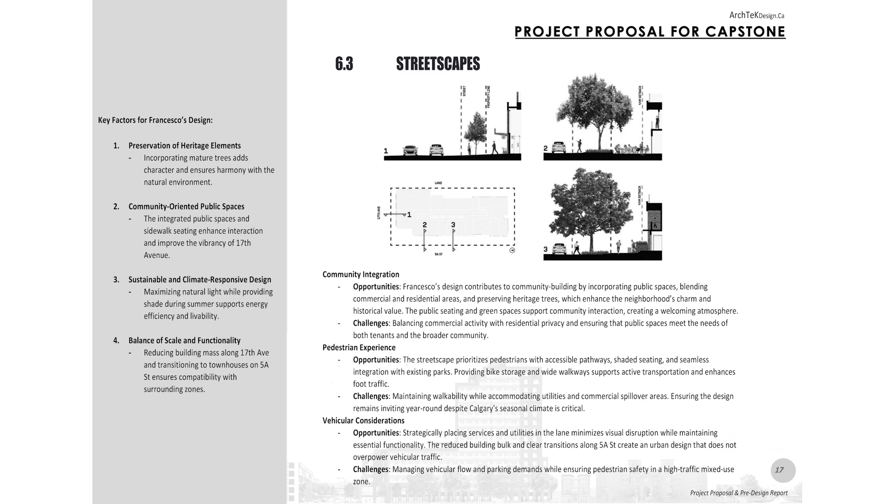We started our Capstone journey by presenting our project proposal, which centers on the redevelopment and enhancement of Francesco's mixed-use building. The project aimed to transform the existing structure into a vibrant, sustainable space that integrates commercial activity on the ground floor with a variety of residential units above, promoting community engagement, accessibility, and alignment with current codes and urban planning goals.

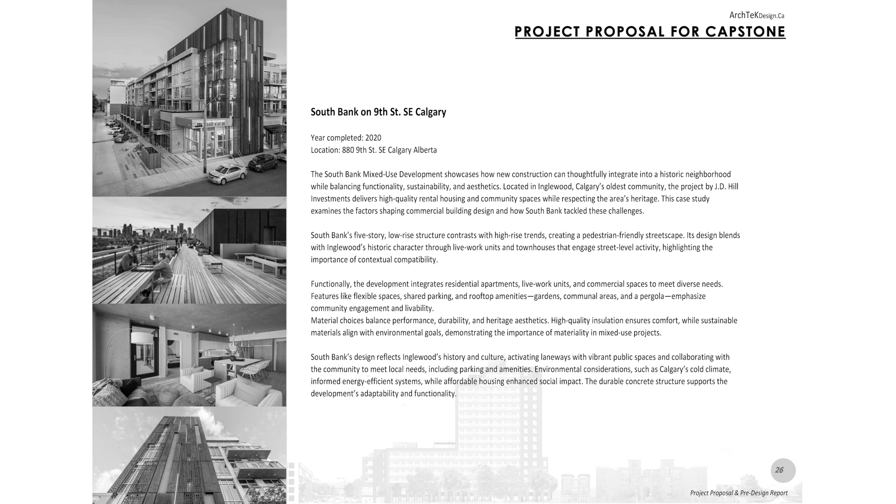Our concept layout focuses on thoughtful urban integration using step-back massing, mixed-use programming, and clear zoning to create a sustainable, community-oriented design with vibrant public spaces and strong connections to the surrounding context.

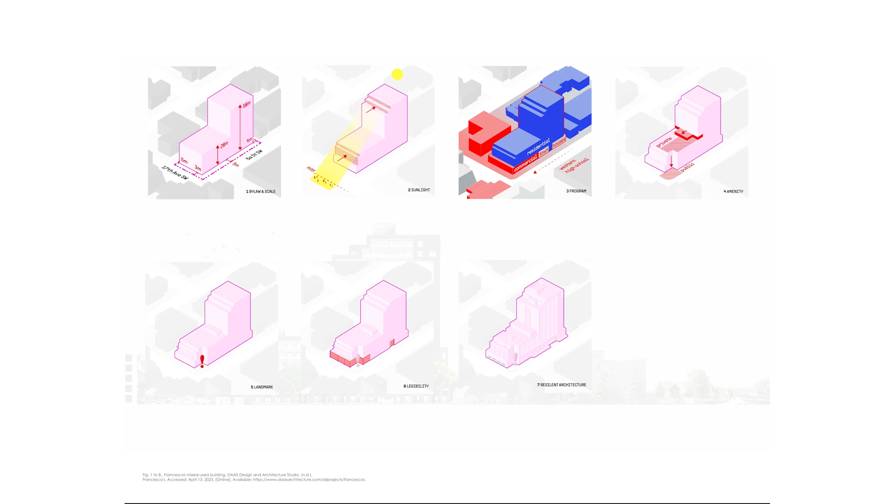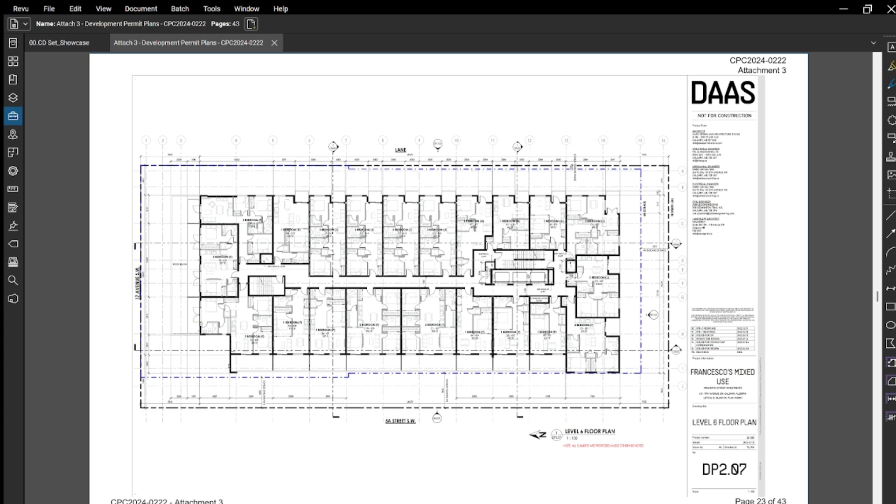To take a more real-world approach, we worked from an existing set of development drawings provided by an architectural office, taking these earlier documents and carrying them out to contract documents instead of designing ourselves. Our goal was upholding the design intent set forth by the original architect, and this approach to the Capstone project meant we could have a more technical focus, prioritizing systems and code implementation, and really understanding the software we are using.

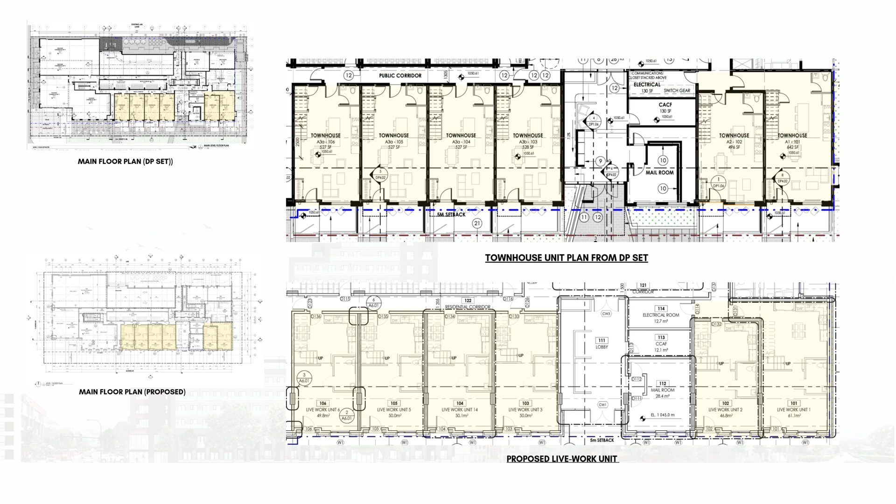One of the most successful outcomes of our project was converting townhouses into live-work units. This allowed us to navigate the zoning restrictions of the 5A Street neighborhood while respecting its character and scale. The live-work concept provided flexible spaces that support both residential and commercial use, offering greater revenue potential for the client.

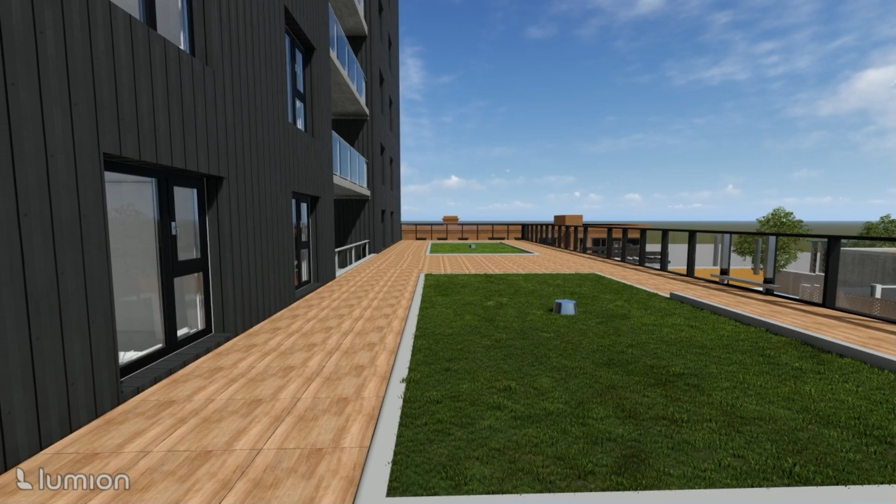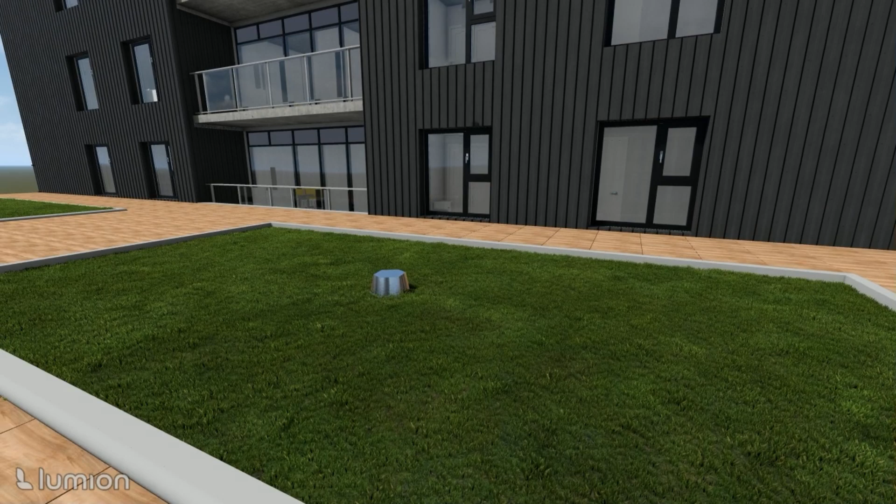Another key highlight was the integration of a green roof. This transformed an underutilized rooftop into a sustainable functional space that improves energy efficiency, manages stormwater, and reduces the urban heat island effect. It also offers residents a natural area for relaxation and social connection, enhancing livability in a dense urban setting.

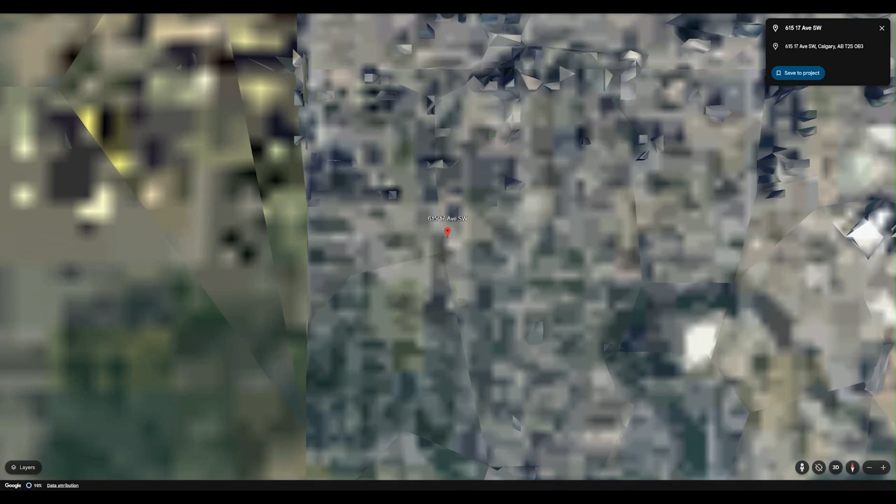Our project is located at 615 17th Avenue Southwest, Calgary, in the evolving community of Cliff Bungalow, just south of the Beltline. Positioned along the active 17th Avenue corridor, the site benefits from both established urban fabric and ongoing development, making it ideal for revitalization.

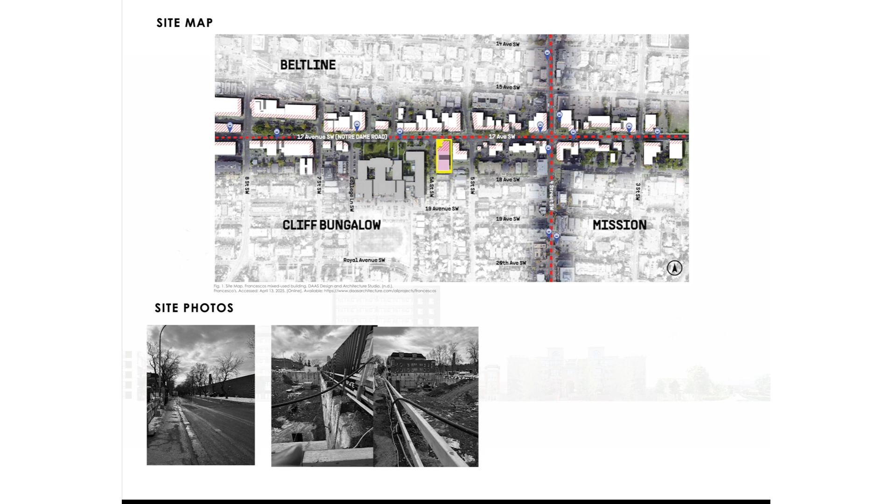The project covers a parcel area of 28,735 square feet with a proposed direct control zoning. The building features a variety of occupancies with a total GFA of 171,965 square feet and a maximum height of 50 meters. The design aims to contribute meaningfully to the urban streetscape and support the continuing growth of this key inner city corridor.

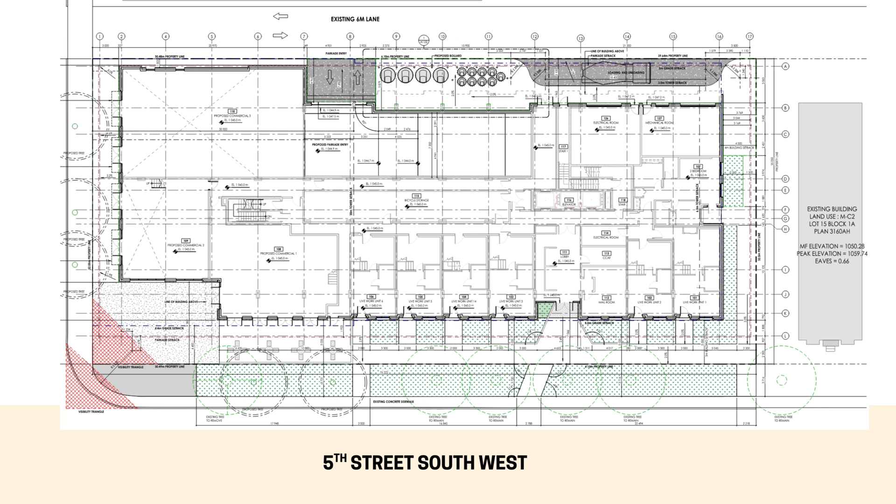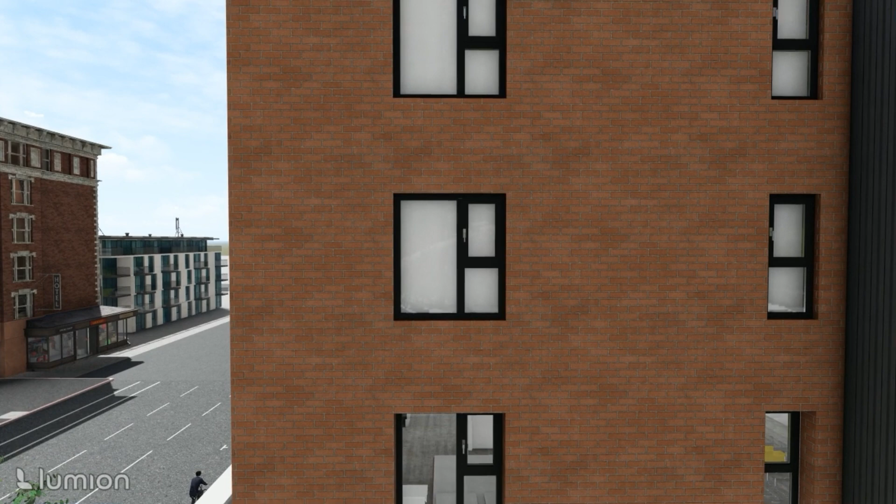With entrances on both 17th Avenue and 5th Street, the lobby, service access, and retail frontage were carefully positioned to avoid conflicts and maintain a welcoming street presence. Designing the Francesco mixed-use building was a complex yet rewarding challenge. We paid close attention to the building envelope, selecting materials and systems that balance durability, aesthetics, and energy performance.

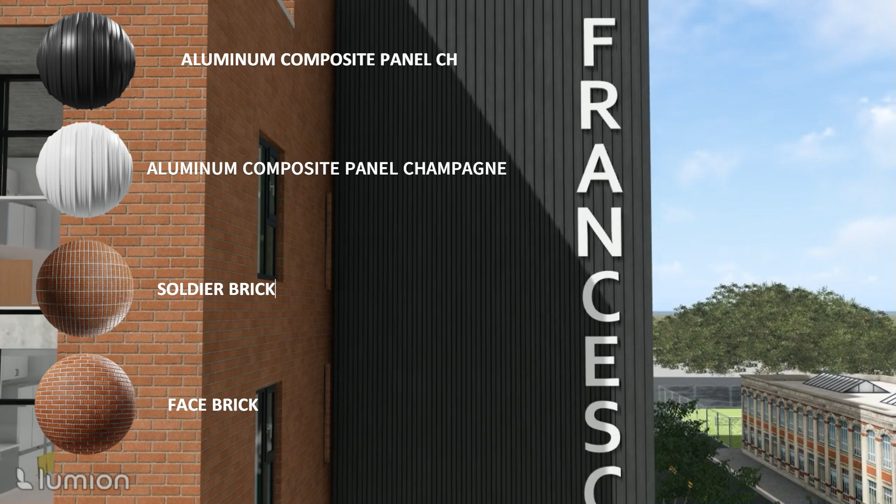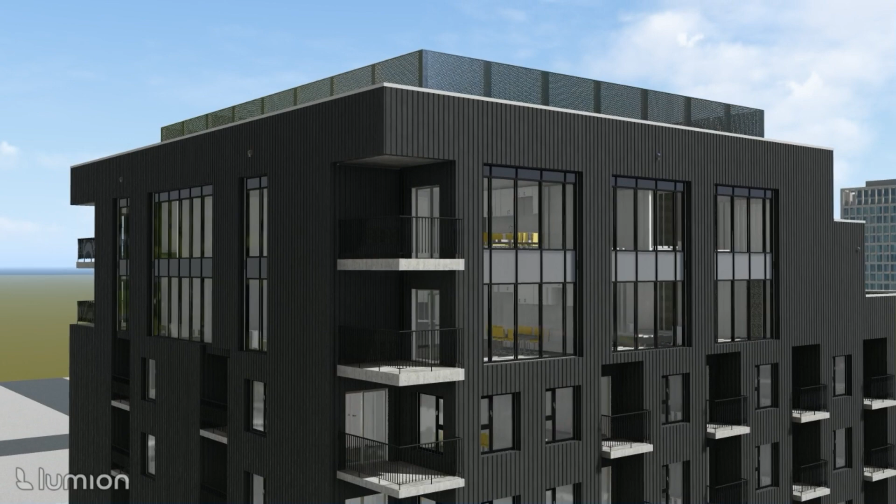The exterior of Francesco's features key materials such as aluminum composite panel paired with brick cladding in red to complement the surrounding architectural character. Curtain wall and window wall assemblies enhance energy efficiency and daylight access. These materials were selected not only for their durability and visual contrast, but also to highlight different building elements while maintaining a cohesive overall appearance. The aluminum panels introduce a sleek, contemporary feel, while the red brick adds warmth and connection to the historical context of the 17th Avenue corridor.

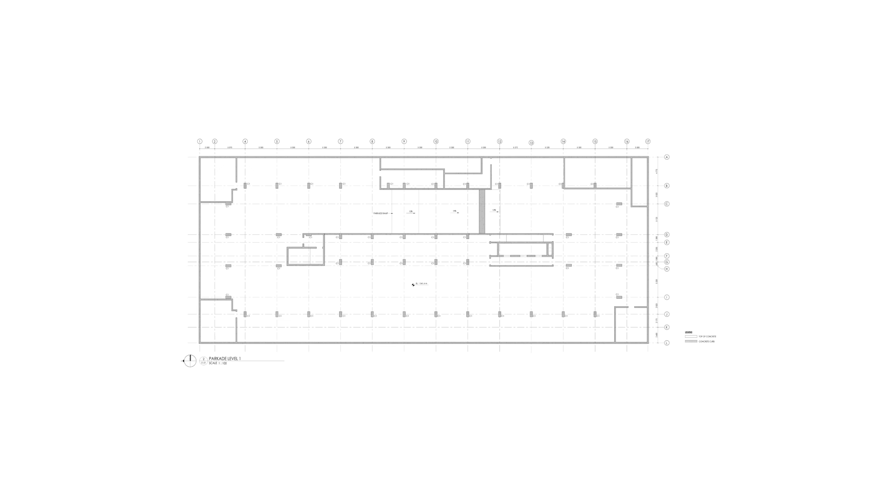Our challenge in the DP set was understanding how the building would stand and be constructed, leading us to develop a structural system that prioritizes stability and efficient load transfer. We used L-shaped strip footings with foundation walls and pad footings supporting a two-way slab system. A shoring wall was added to retain soil and stabilize the excavation.

At level 3, a setback created an unbalanced elevation, which we addressed with a transfer slab to redistribute loads. For lateral stability, shear walls were placed near the central core, resisting wind and seismic forces. Above, a flat plate slab system ensured simplicity and effective load distribution, creating a stable and robust structure.

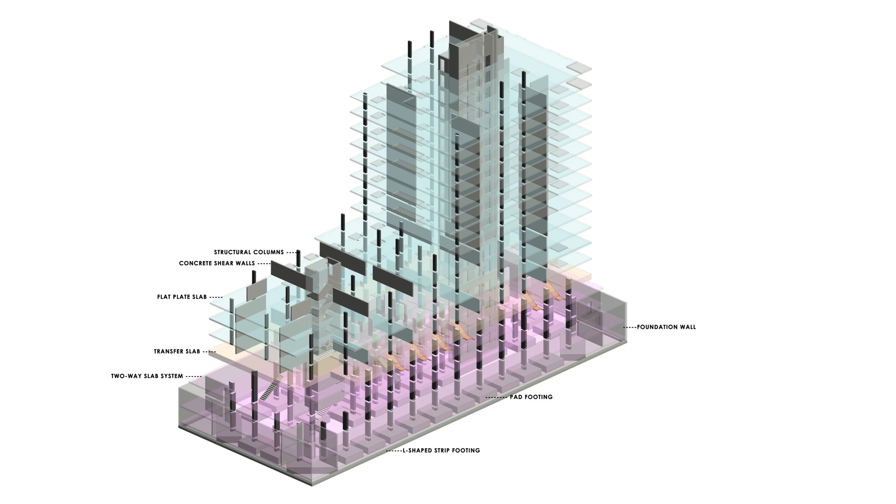Francesco's is a 16-story mixed-use building with thoughtfully organized occupancies. It includes 2 levels of underground parkade with a total of 96 parking spaces to support both residents and visitors. Levels 1 and 2 feature commercial retail spaces and 6 live-work units, with commercial fronting 17th Avenue and live-work units oriented along 5A Street, encouraging street-level interaction on both sides.

From levels 3 to 16, the tower transitions into residential. A dedicated gym area is located on level 7, offering convenient access to residents. In total, there are 106 one-bedroom units, 73 two-bedroom units, 28 three-bedroom units, and 3 spacious 4-bedroom units.

The core layout, which includes both the elevators and 2 exit stairwells, was essential in keeping residential circulation simple and compliant with life safety requirements. By centralizing vertical circulation, we ensured that residents could easily access their units while also maintaining proper egress distances and fire separation throughout the building.

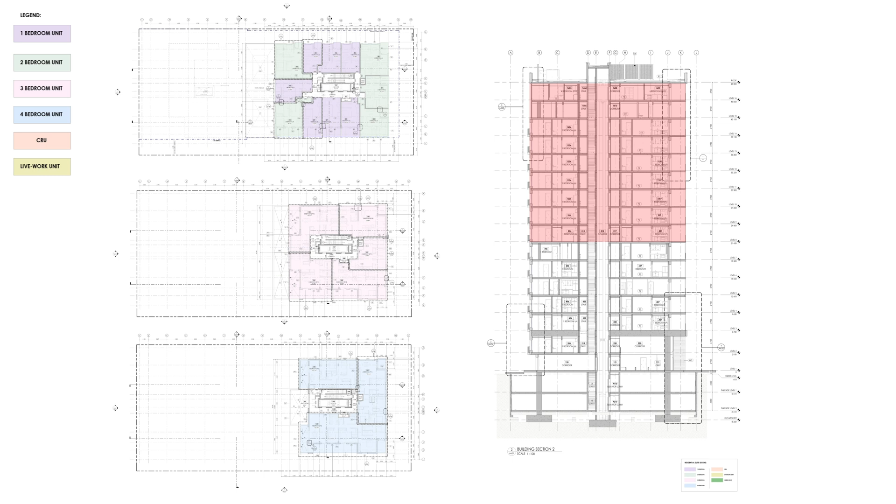The building also incorporates multiple roof areas located on levels 3, 6, 7, 8, 15, 16, and rooftop, with green roofs integrated into levels 8, 15, and 16 to add visual interest to upper-level terraces.

We focused on this detail as it addresses critical aspects of load transfer, waterproofing, and thermal bridging. It ensures both structural integrity and long-term performance of the building envelope. The precast concrete is sloped away from the building for proper drainage.

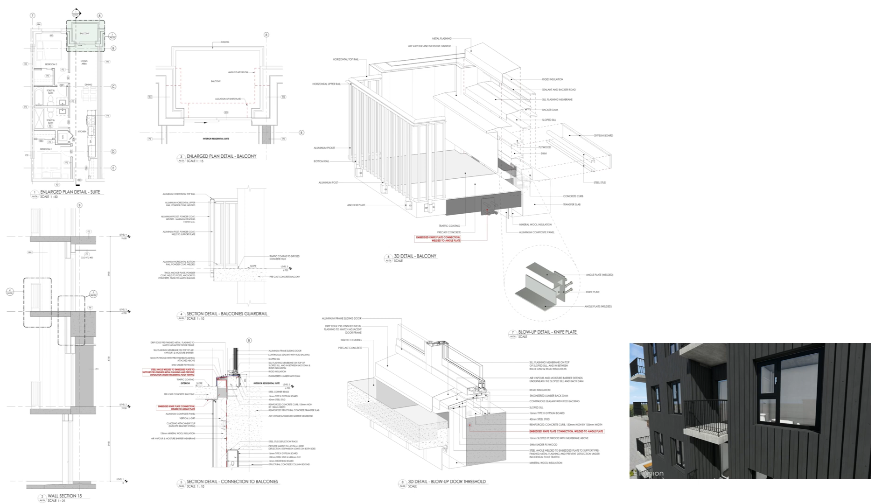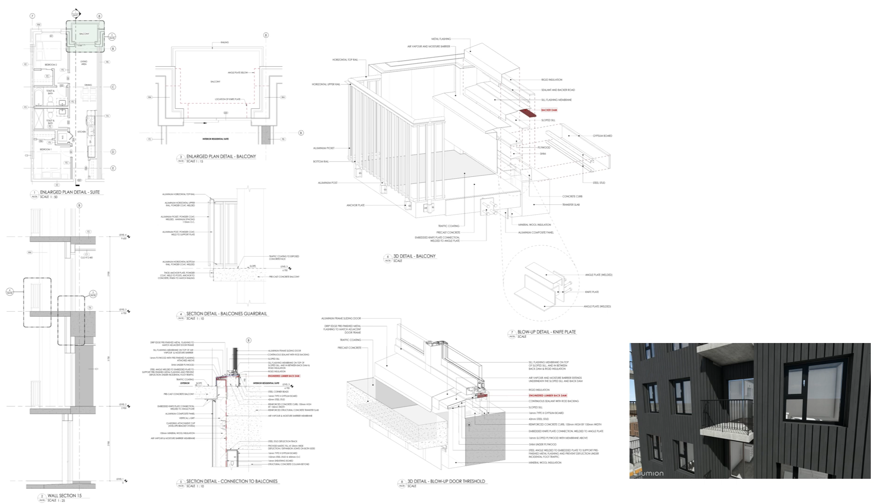It's supported by an embedded knife plate welded to an angle plate, which allows for slight movement from temperature changes while maintaining stability. Continuous insulation between the plates minimizes thermal bridging and improves energy efficiency.

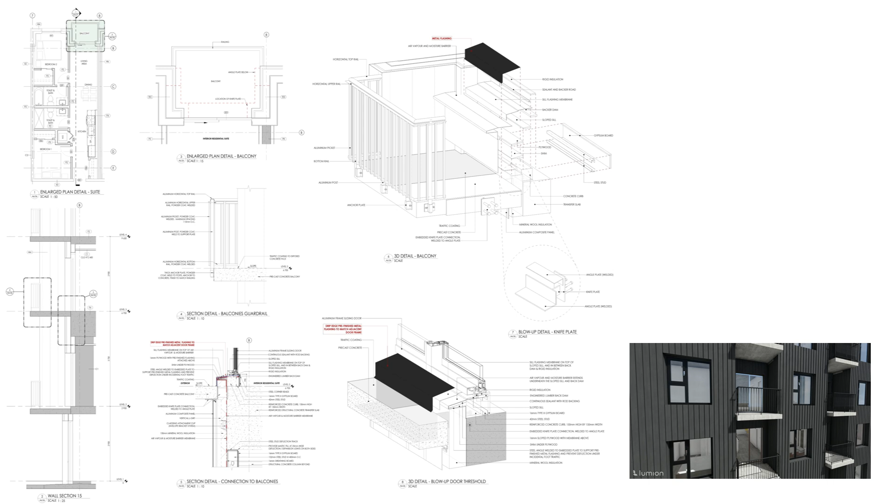The sloped sill and engineered lumber back dam manage water effectively. The sill directs water away while the back dam acts as a secondary barrier preventing moisture intrusion. An air, vapor, and moisture barrier runs beneath the sill and back dam, forming a continuous protective layer. A sill flashing membrane is installed on the top, and a drip edge flashing redirects water away from the facade. This level of integration is important because it balances structure, performance, and durability in a single high-performance connection.

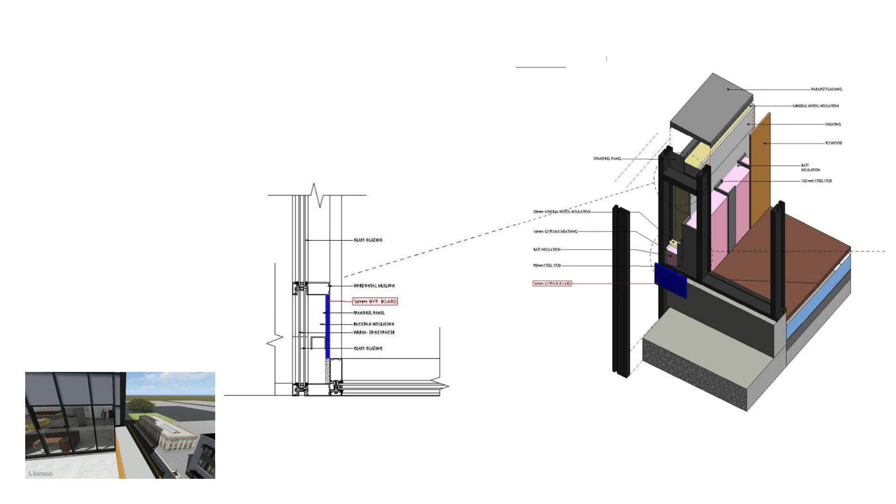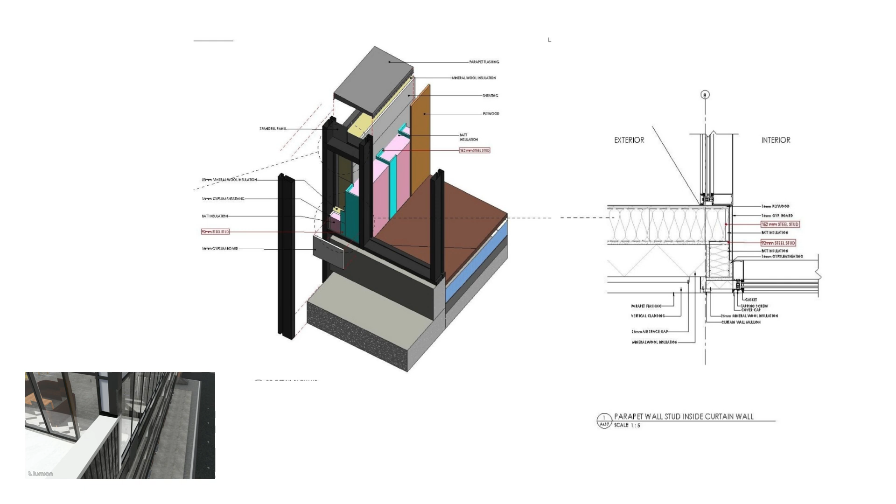Following that are the steel studs, starting with a 152mm stud as the primary support and a 92mm stud added to reinforce the connection and achieve desired alignment. Between these layers, insulation is installed to address thermal performance. The team believes this setup provides adequate coverage to help prevent thermal bridging across the connection. All of this ties into the curtain wall system, where the mullions became a key visual and structural element. Its placement plays a crucial role in blending the transition between the two systems, creating a clean and seamless finish.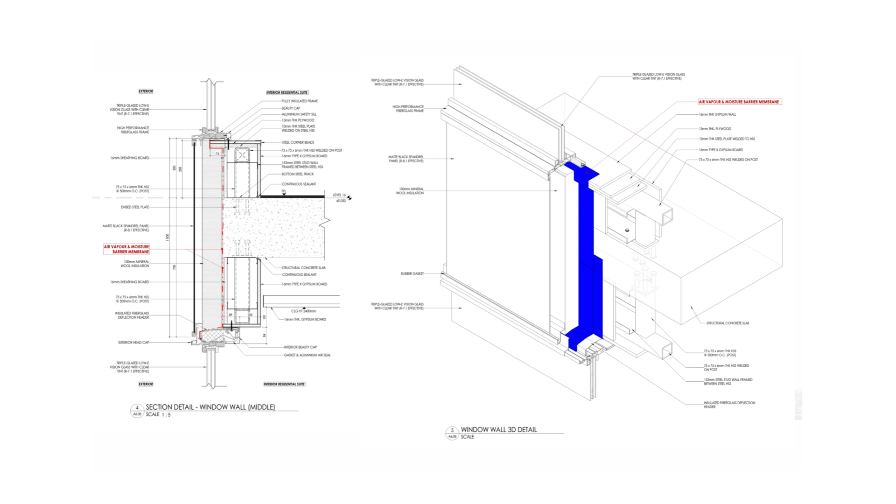Another detail we provide is the window wall assembly between level 15 and 16. Starting at the exterior, we have triple glazed glass, which provides excellent thermal insulation and sound control. Below it, the spandrel panel conceals the floor structure while maintaining the continuous glass facade. Framing the glass are the window wall mullions, which structurally support both the glazing and spandrel panel. Behind the outer layer, there's a combination of mineral wool insulation and an air vapor membrane working together to reduce heat loss and prevent moisture infiltration.

The main structure is supported by a steel hollow section frame, and in between these members, steel studs are added to support interior finishes. On the inside face, the wall is finished with gypsum board, creating a clean surface while also contributing to fire protection. Overall, this window wall detail delivers thermal performance, durability, and a clean architectural expression, making it an ideal solution for a commercial building envelope.

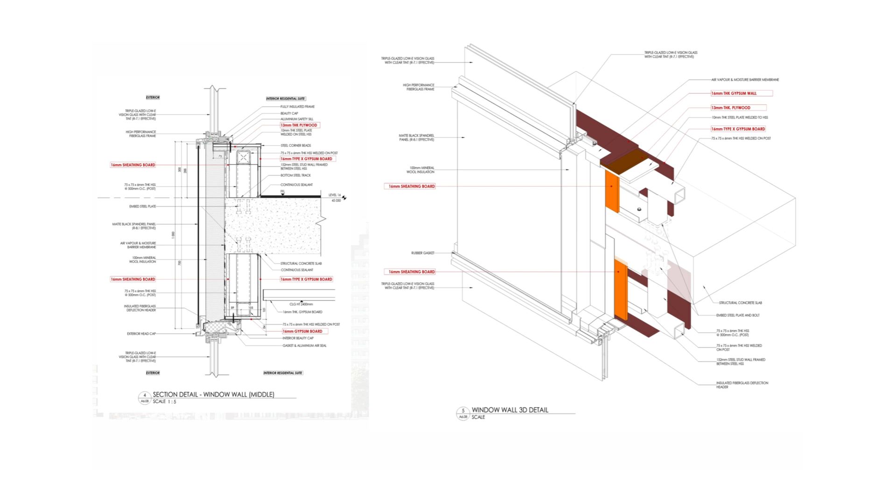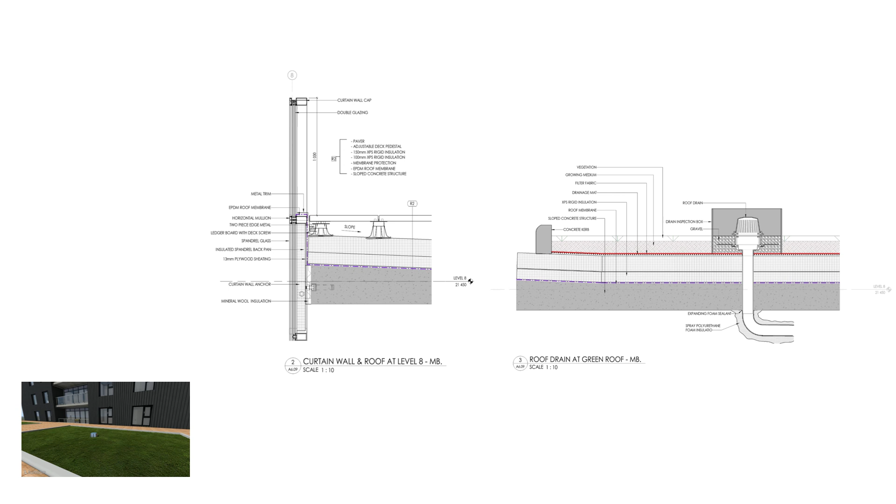In curtain wall construction, anchor channels are embedded in the concrete slab edge. T-bolts slide into these channels, allowing adjustable positioning. Steel brackets are then bolted to the channels, supporting the vertical mullions. This system ensures a secure, load-bearing connection that transfers curtain wall loads to the structural frame.

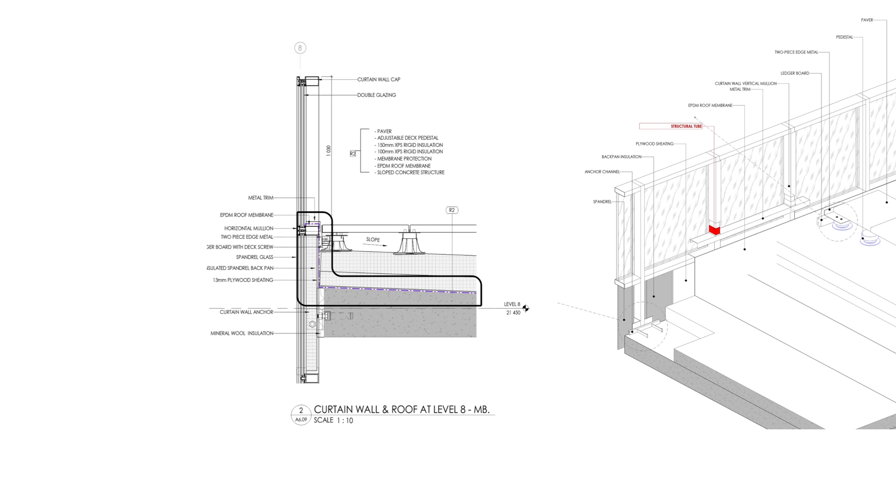In this roof system, the EPDM membrane serves as the primary waterproofing layer. It wraps the structural tube and extends over curtain wall mullions to maintain waterproofing continuity. This extension prevents water ingress at the transition, accommodates movement, and ensures a durable seal. A metal trim conceals and protects the EPDM, completing the weatherproofing detail.

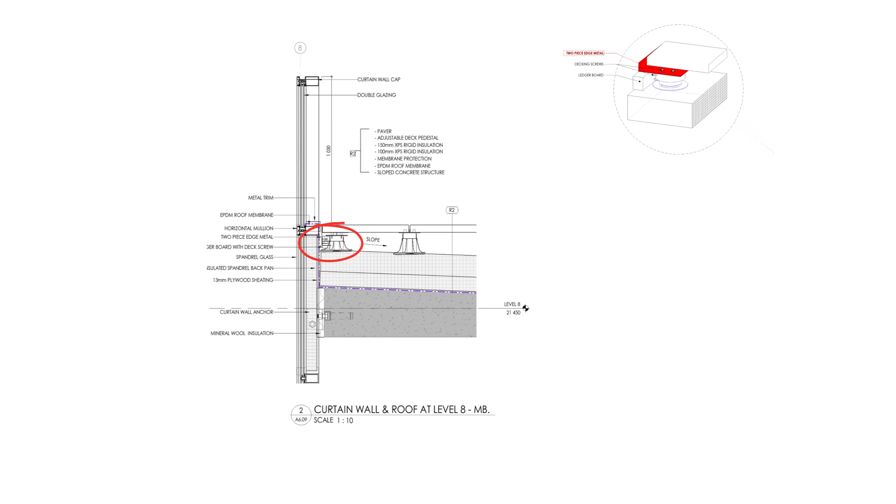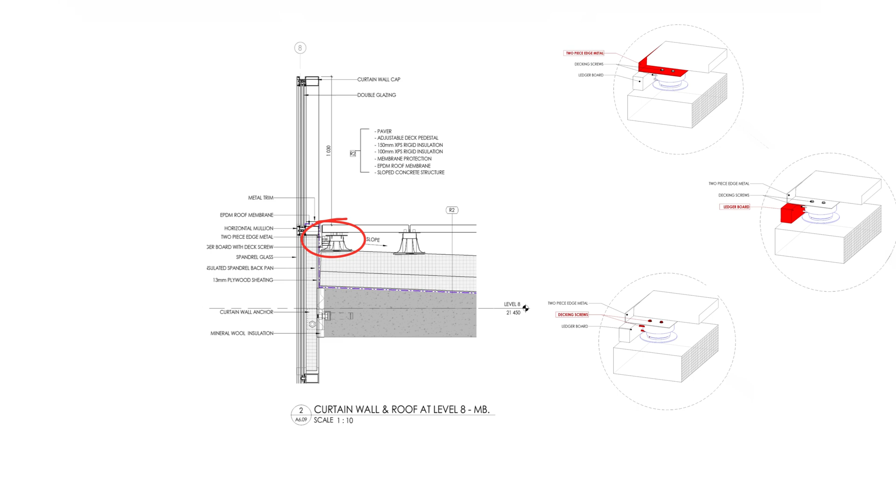Pavers were incorporated to enhance the roof system's durability, weather resistance, and functionality, offering effective drainage and a smooth walking surface. To keep them firmly positioned, a two-piece metal flashing system was used, fastened to a solid ledger with deck screws. We wanted to include some interior shots of our building.

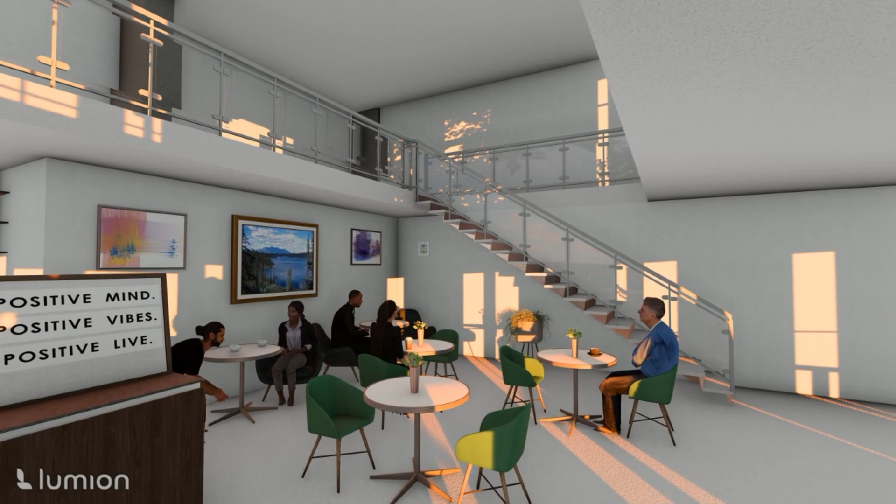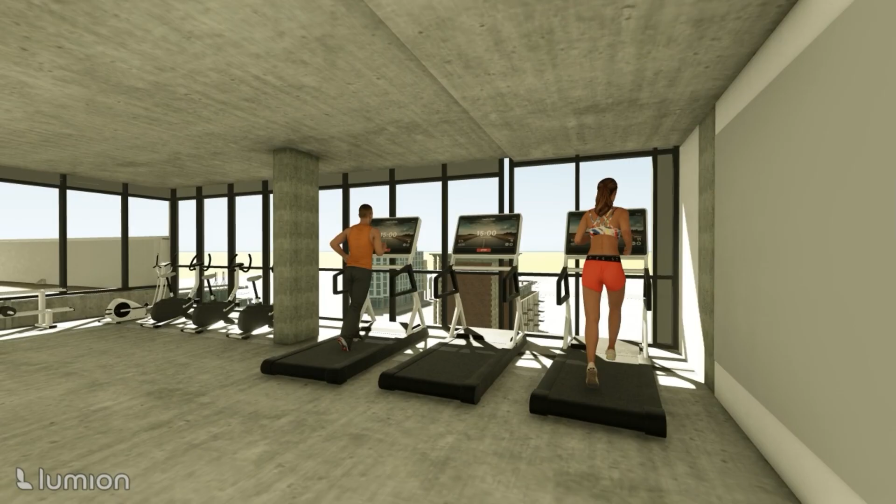Throughout the various phases of this project, we gained valuable knowledge and experience by simulating the role of an architectural technologist. We came to understand just how complex and demanding it can be to develop an accurate and coordinated construction document set, especially for a project of this scale.

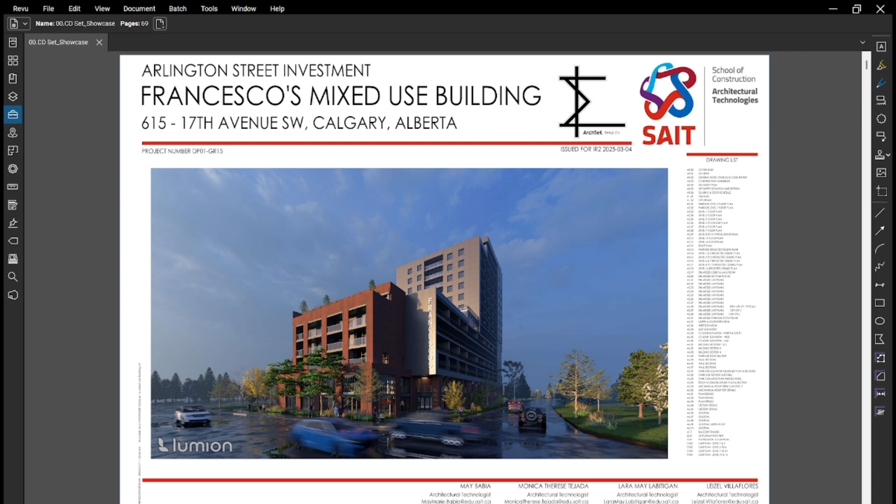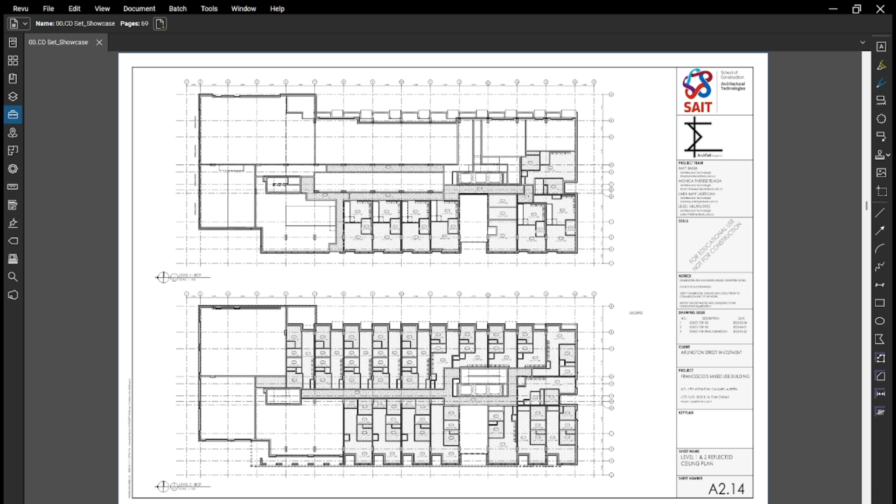One of the biggest challenges we faced this semester was dealing with drawing files in the development permit set that were not properly scaled. This affected the accuracy of our grid layouts and the placement of structural elements such as columns and foundations. To address this, we identified the discrepancies and used Bluebeam to recalibrate the drawings. By referencing known dimensions, we were able to establish accurate measurements and adjust our grid systems accordingly. Once the grids were corrected, we proceeded with placing columns in coordination with the structural layout and began developing the foundation plans with confidence.

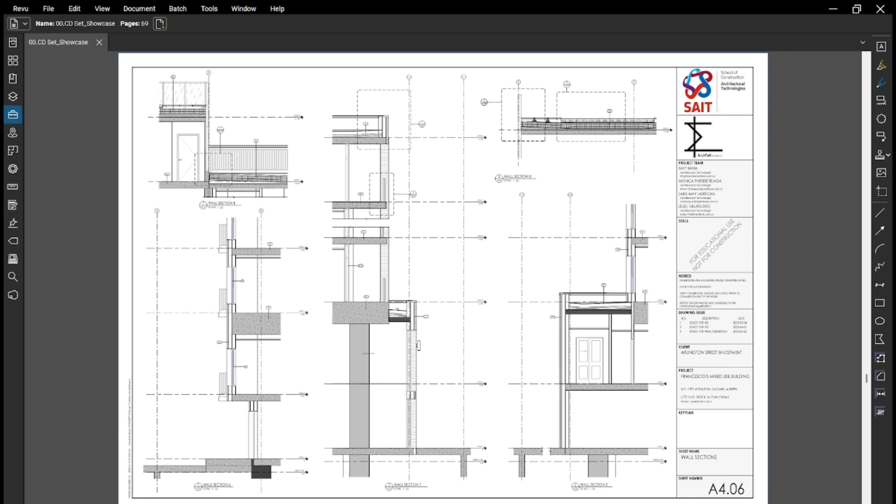We believe our greatest achievement this semester was our ability to develop creative and effective solutions to the challenges we encountered, allowing us to produce a comprehensive CD set that successfully captures and delivers the intent of the original design.